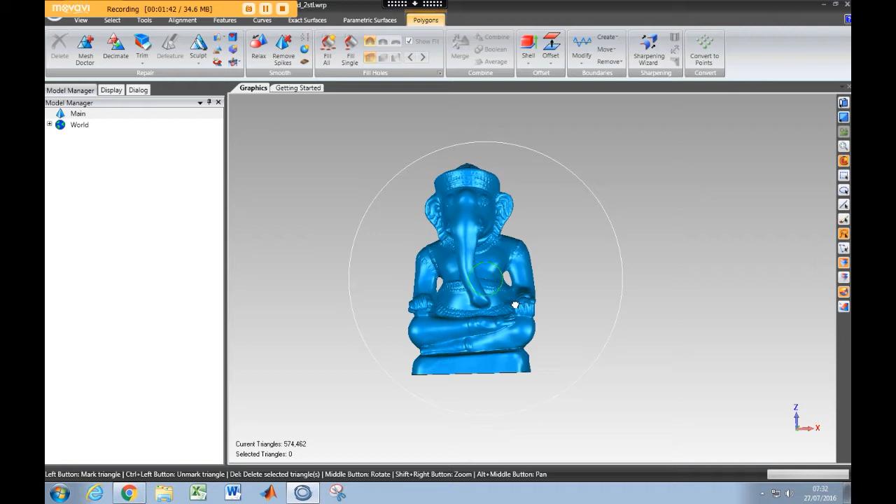Hello and welcome to this first tutorial where I teach you how to make a negative or a mold for clay casting or clay modeling using 3D printing.

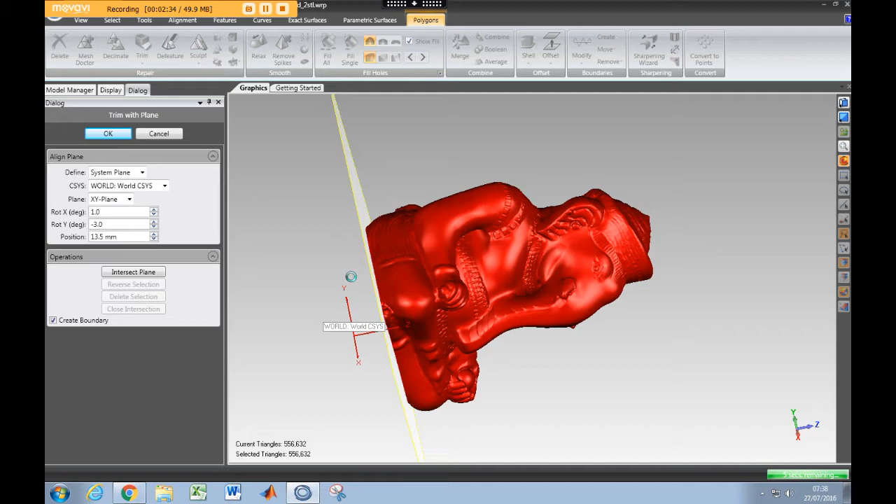I'll start by getting rid of features that I feel are not necessary. For example, the base at the bottom can be deleted, to make things more simple. I'm using the trim function with the plane option to get rid of this section. I selected the appropriate section where I feel it should be deleted, and using the intersect button I isolated that part. Then I delete it and close the intersection so that the file is watertight. So that's the result of this process.

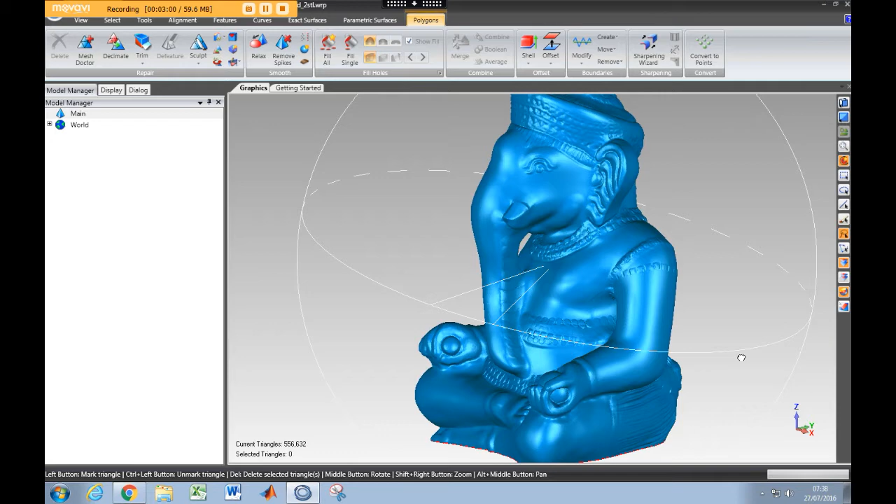This is how a normal file looks like in a software called Geomagic Studio, which is a very powerful software for STL editing and post-processing. It's also good for rectifying errors and fixing them just before printing. So I'm quite fond of this software.

I use it very often in my day-to-day life to prepare files. Just before I start making the mold, I'm going to duplicate this file, because one thing I don't like about this software is that it doesn't have an undo function. You can't use undo quite a lot, so it's very hard to recover if you're making serious changes.

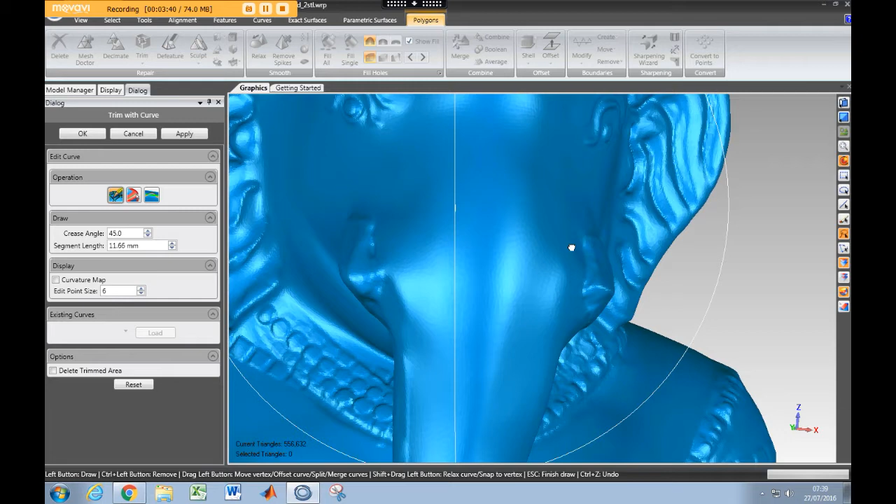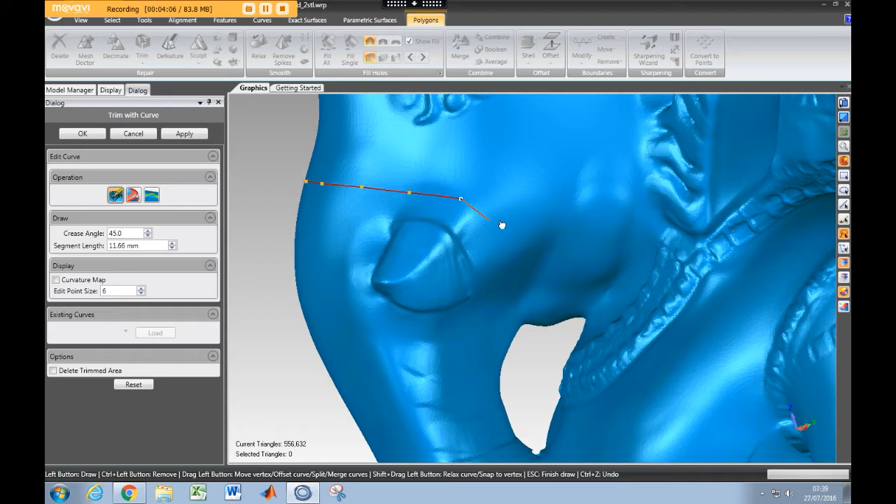Here I'm starting with a trim with curve function to isolate the trunk part of this figure. This is just to make access for the clay easy in the mold. I'll be designing a separate mold for this section, and the main mold will have a smoothed out section where the trunk is supposed to be. So I'm going to carefully isolate this using the curve option.

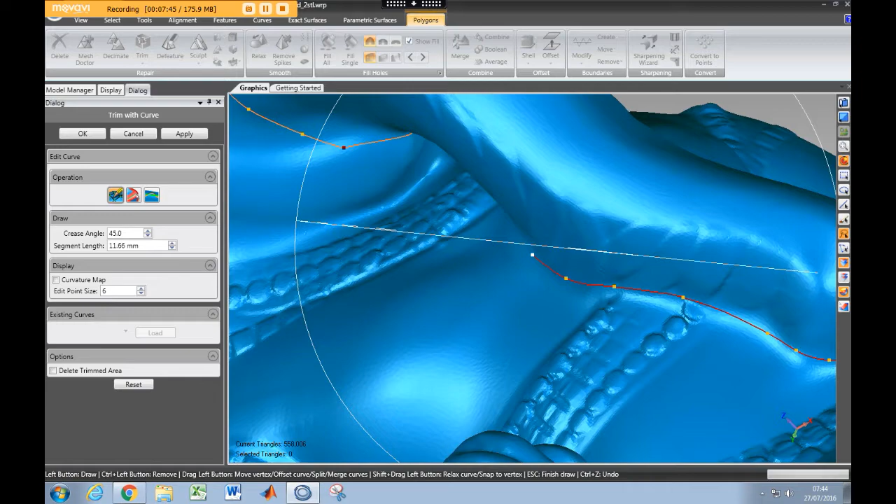I'm going to repeat the same steps for the arm and some part of the knee, just to make access very easy for the clay once the mold is printed.

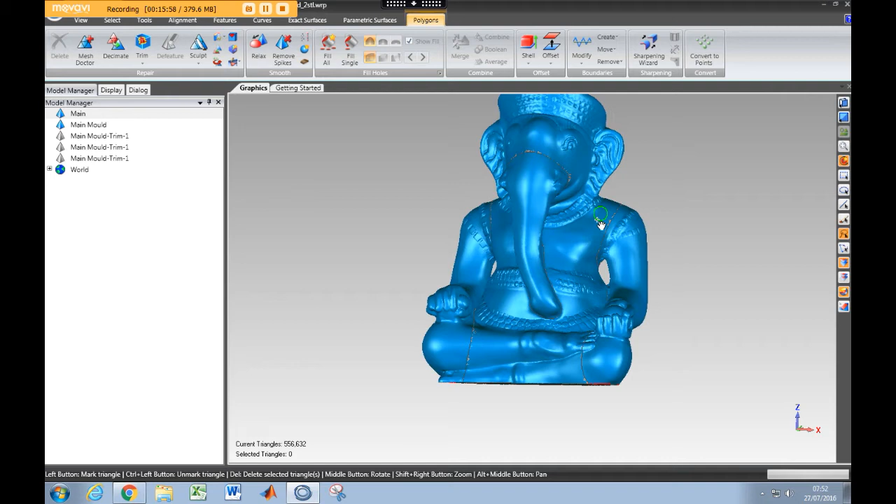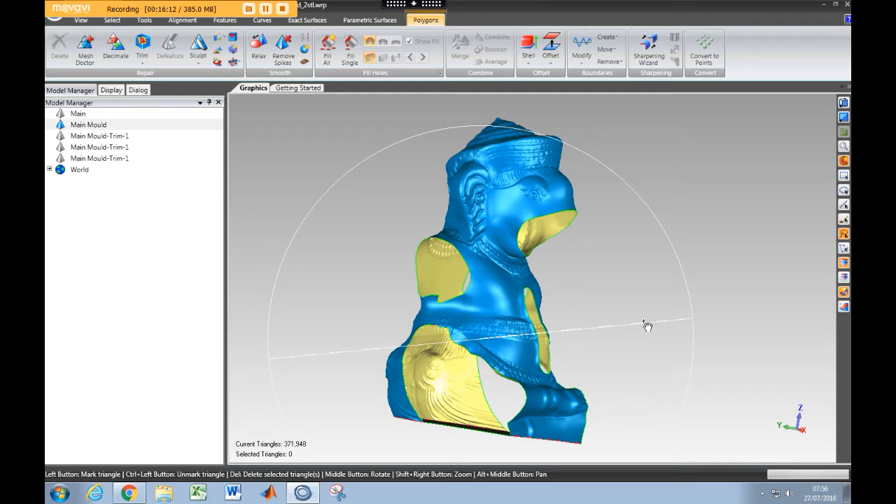This is how it will look like without the arms and the trunk portion. The next step will be to fill the holes using the fill hole option with tangent mode on. I'm going to select each hole and then fill them to see how well it's filled without any errors in the file.

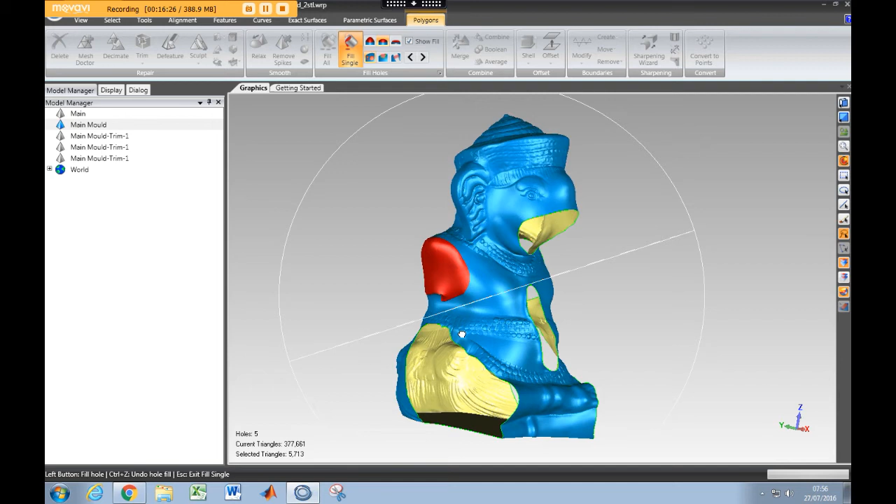Select the tangent mode, and it looks pretty well. I'm going to continue using the same option for other holes. It does look a little bit sharp on some of the edges, so I'm going to have to smooth them once I've finished with the hole filling method.

Repeating the same procedure for the trunk using tangent mode. It looks a little bit sharp here, so I'm going to try the flat option instead. This is the end result after the hole filling is finished, so I'm going to have to defeature some of these sharp edges so that the mold surface is smooth.

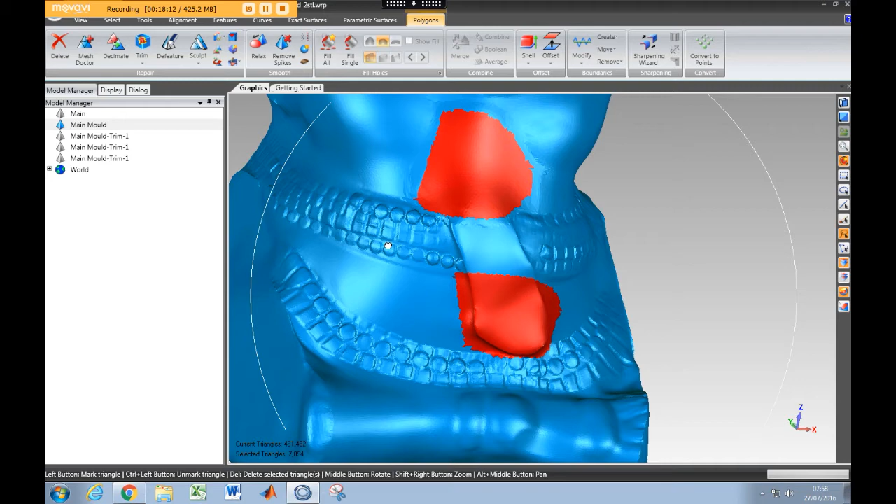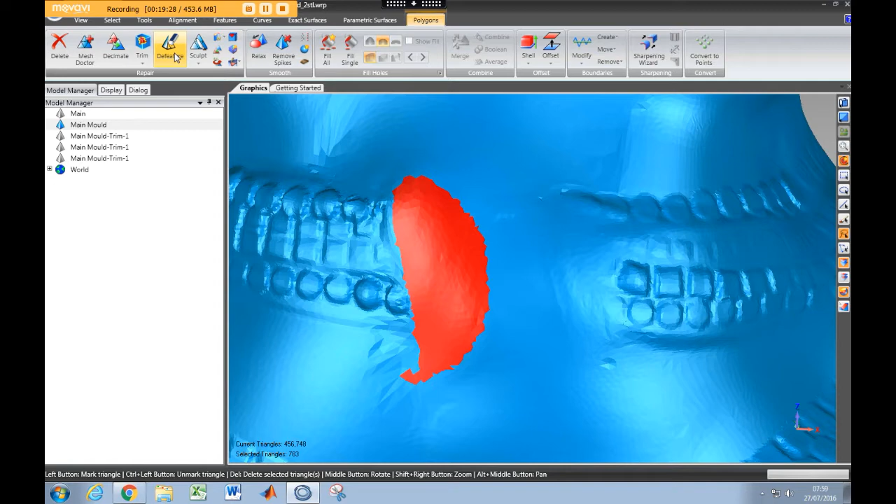I'm going to fill the rest and defeature them. I just select the area where there's overlap between the sharp and the smooth area, then select the defeature option. I'll have to repeat the same procedure for all the sections. It said it can't do it because some of the area isn't selected, so I select that area and perform the defeature operation again to see the results. Yeah, so it looks pretty good.

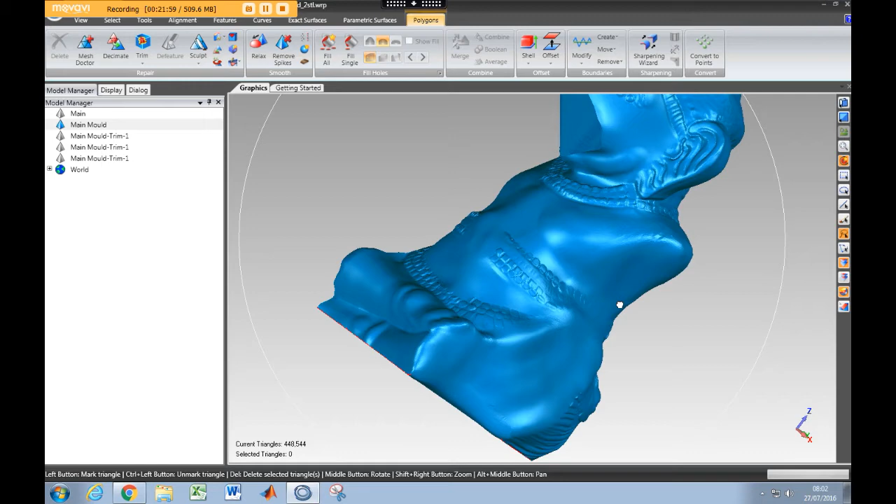I'm going to repeat the same procedure for the trunk. It forms a little bulge at the top, so I'm going to get rid of it using a smaller area. That doesn't work, so I'll defeature it, or get rid of this bulge, using the sculpt option and sculpt remove. I've increased the diameter of the tool, so you can remove the area or push it in.

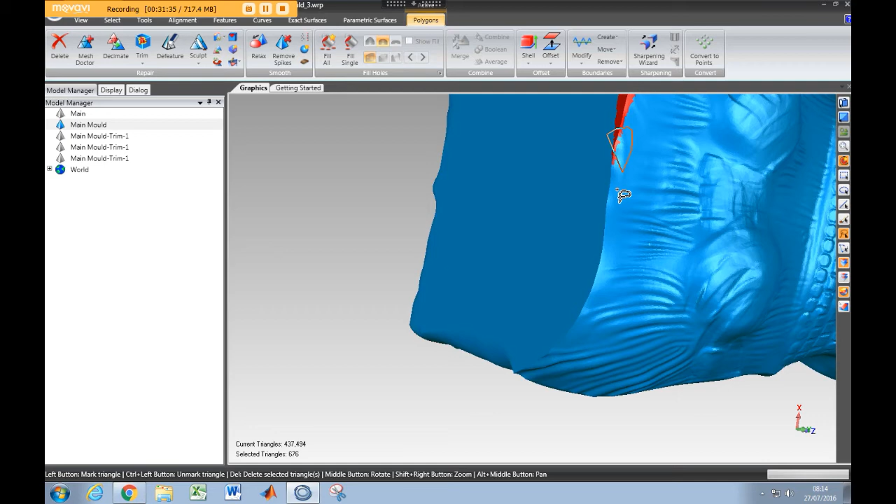So the file looks good. I'm going to use Mesh Doctor to check if there are any problems in the file. For example, there are spikes in the file, and I'm going to selectively fix these errors one by one. So the file looks ready for creating the negative.

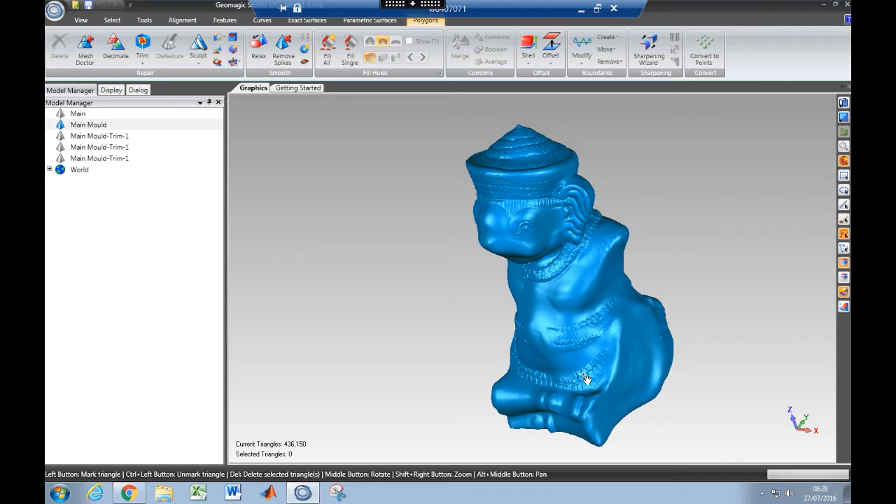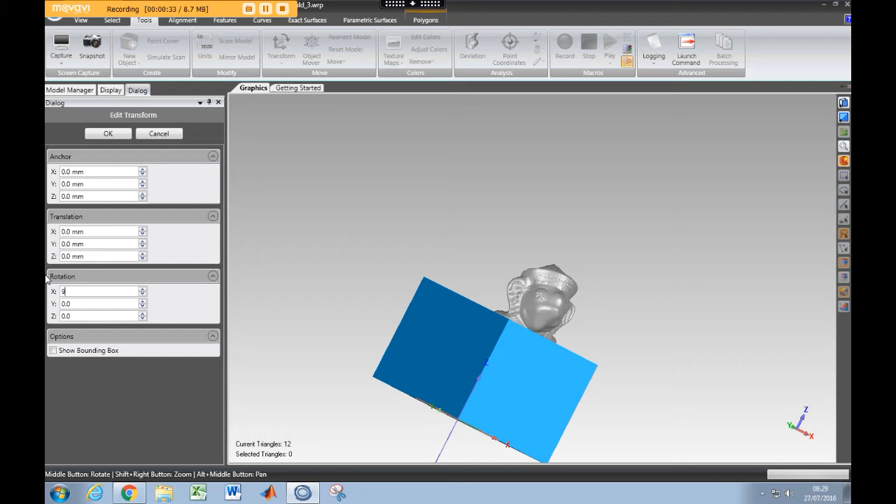I'm going to import a cube of the same size, a little bit bigger than this original STL. I'll rotate and try to fit or align the new mold square block with the existing STL file of the Ganesh.

I've made this block using the dimensions from the existing file, so it may be a little bit tight, so I'm going to increase the scale a little bit so that all the sides are covered and there's enough area. I'm going to turn the transparency on just to see how it fits within this given volume.

It looks pretty good, so I'm going to reduce the areas on the top just to make this model a little bit smaller and increase the area on the sides so that there is significant thickness to the file when I'm printing it.

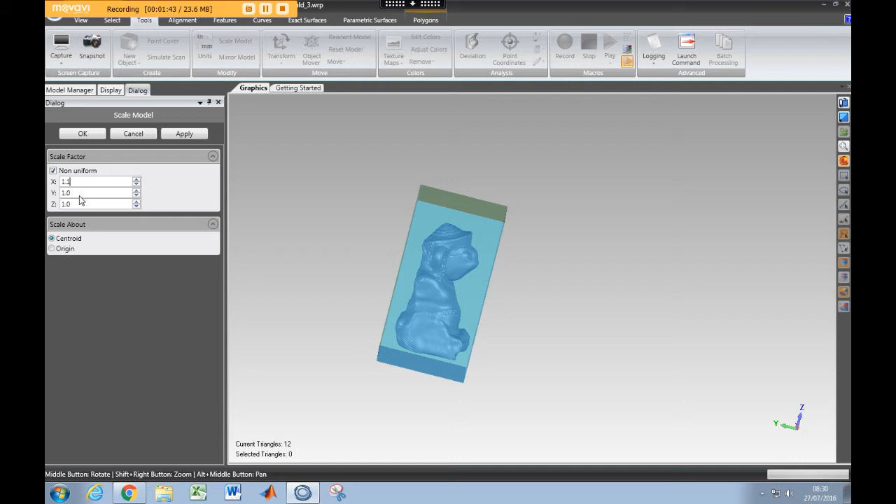Going to reduce the area on the top, so I'm not wasting my material when I'm 3D printing this thing. I'm going to change the scale on the Z-axis so it's a little bit shorter, and then it fits well.

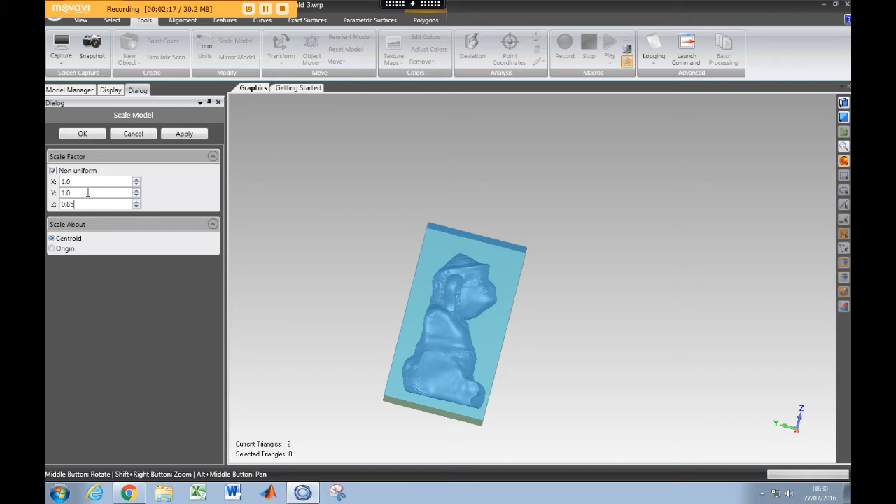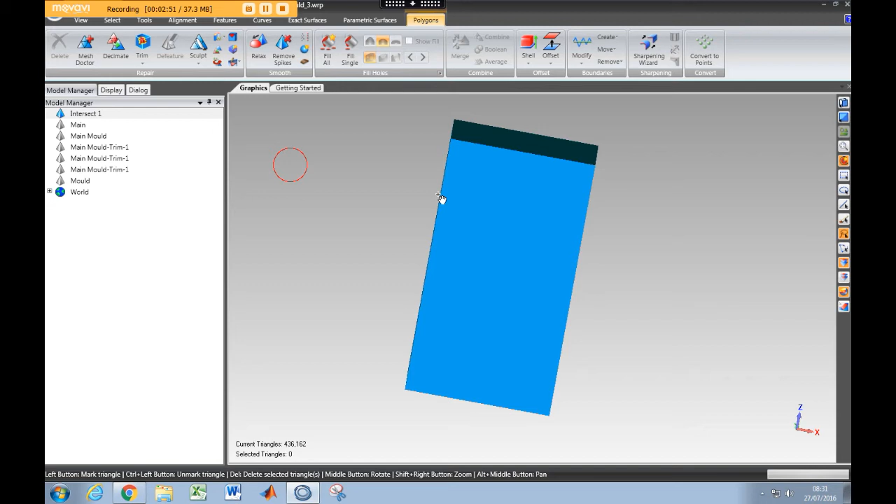So it looks quite enclosed from outside. The next step will be to make a boolean of these files, so I have a tight surface. It will be one STL file, and then the STL of Ganesha, or the section of Ganesha, will be looking inside, and this will be looking outside.

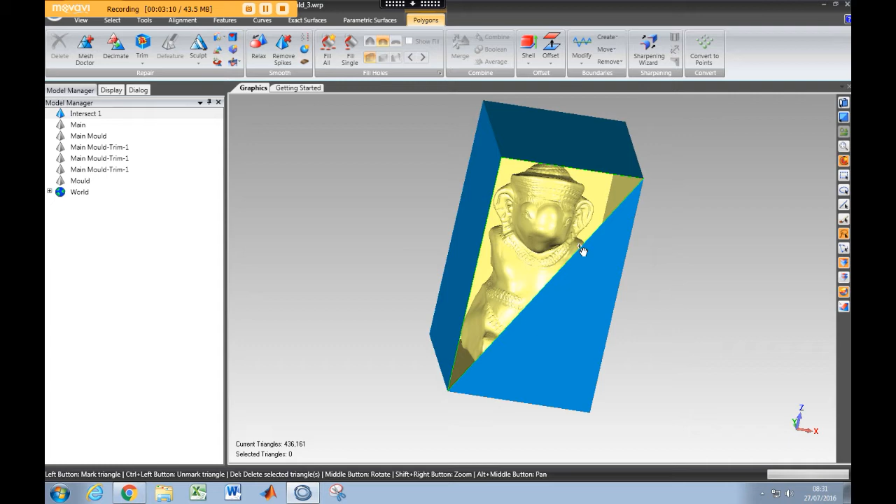But as you see, both the files are looking in the same direction. So I'm going to use an option called flip normals to change the direction, or the vector direction, of the Ganesha file that's inside. Just by clicking flip normals and apply and clicking on the file, I can change the direction. So now it looks like a shell with the faces in the right directions.

I'm going to name this as mold, and there will be a few duplications of it, because a mold is not just one part unless it's casting. This is a clay model, so it will be separate into a few parts, for example 3 or 4 parts, and then they'll be combined together and pressed together, and the clay will be formed.

So I'm going to turn the transparency on again to see where I should make the cuts. I believe that it's quite symmetrical, so I'm going to cut it in the center, but just change the angles a little bit, because I feel that the ears are not aligned and they're not symmetrical.

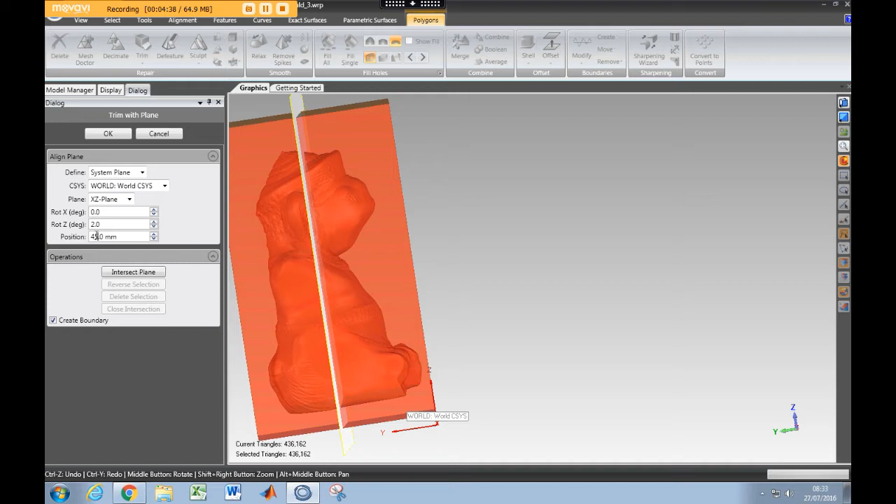So this will form our first cut. I think this is a sufficient angle, and I'm going to just check from the top view that it matches my assumption.

I'm going to split the ears in half, so that one part is in the first mold and this other part is in the second mold, so that the clay can penetrate that small section. There's no convex area inside.

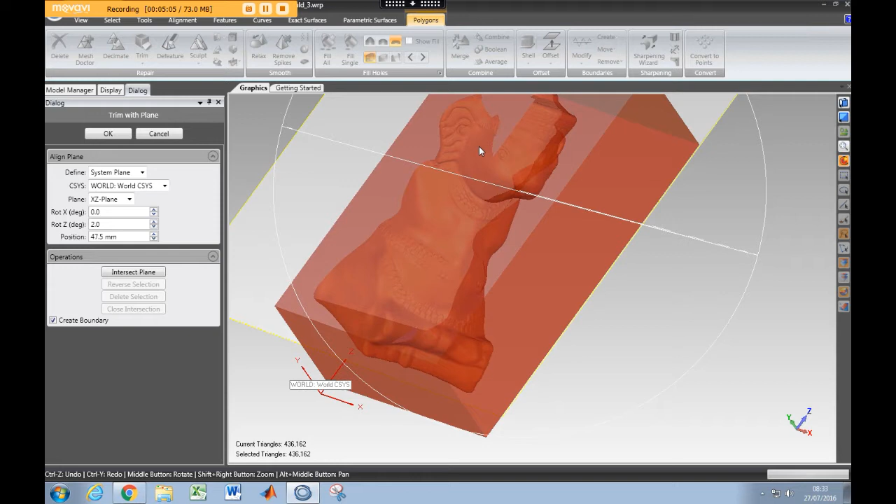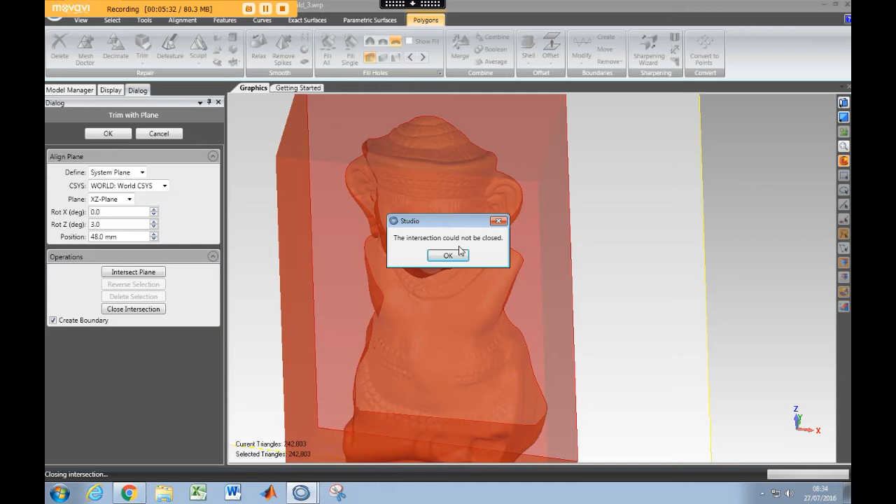I'm going to remember these values so that I repeat the same procedure for the other half. The fill option is not working, so I'm going to fill it later. I'll repeat the same procedure for the other half of the mold, selecting the same values so that they match and form a parting line in the center.

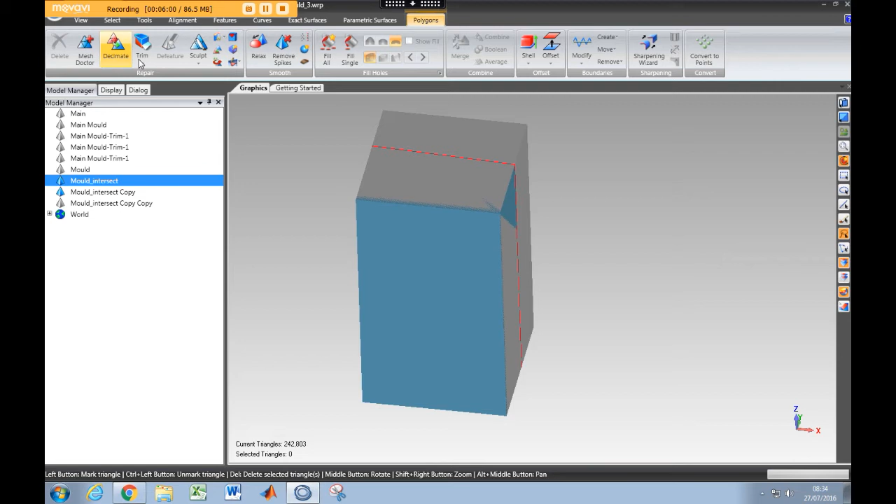It worked for this section but didn't work for the other one, so for the other one I'm going to have to fill it manually. It does show some problems on the top, so that's why I've kept this extra bit on the top and the sides so that I can delete it and get rid of the problems.

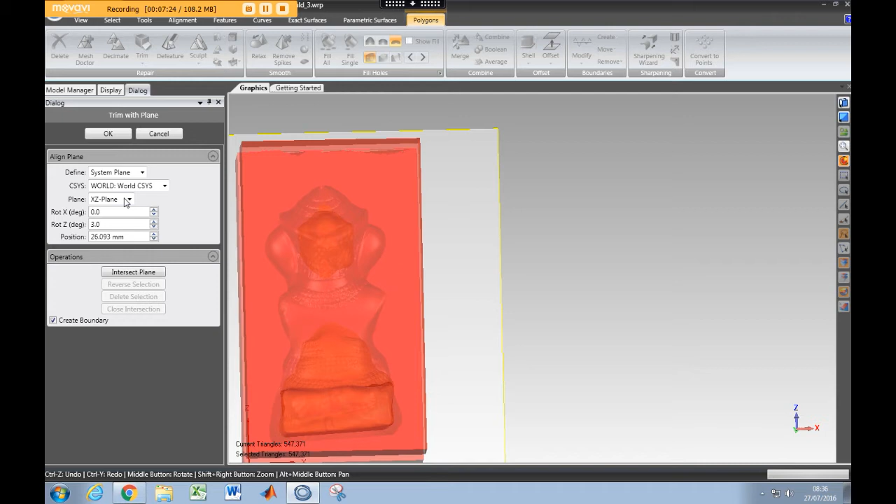So this is both files together, and I'm going to have to delete some of the sections on the top and on the sides so that there are no problems with the triangles in the STL file. I'm just going to select 5 millimeters on each side to get rid of. It should give me sufficient wall thickness for 3D printing.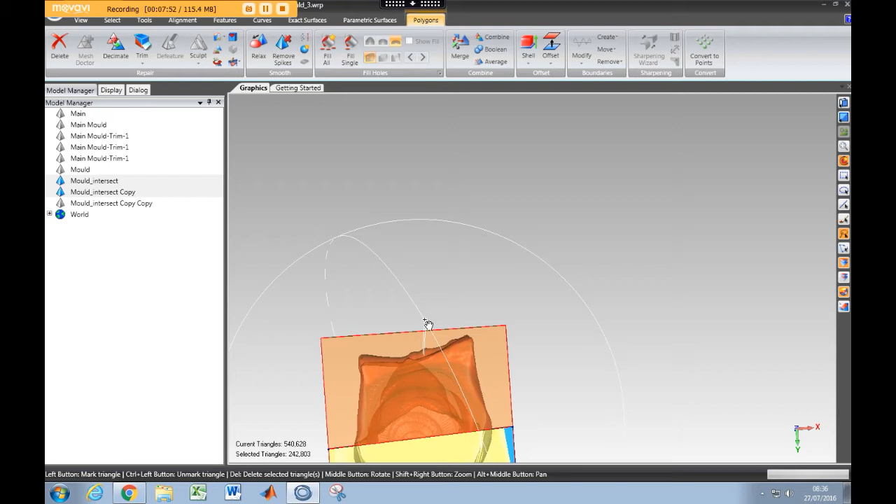So I'm going to fill these holes manually. I didn't select the automatic close intersection option because I knew there would be some problems. I'm going to use the flat option again to see if it works. It doesn't work because the other side of the mold is also open.

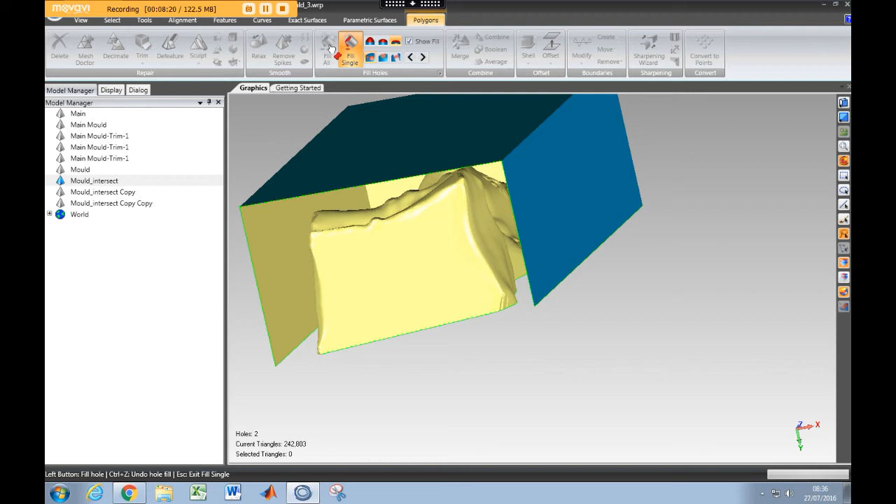As you can see, it's open, so I'm going to have to create a bridge to separate these two holes. I'm going to select the bridge option. It doesn't seem to be working on this side of the mold, so I'm just trying once more.

No, it doesn't work, so I'm going to undo and go on the other side of the mold to see if it works here.

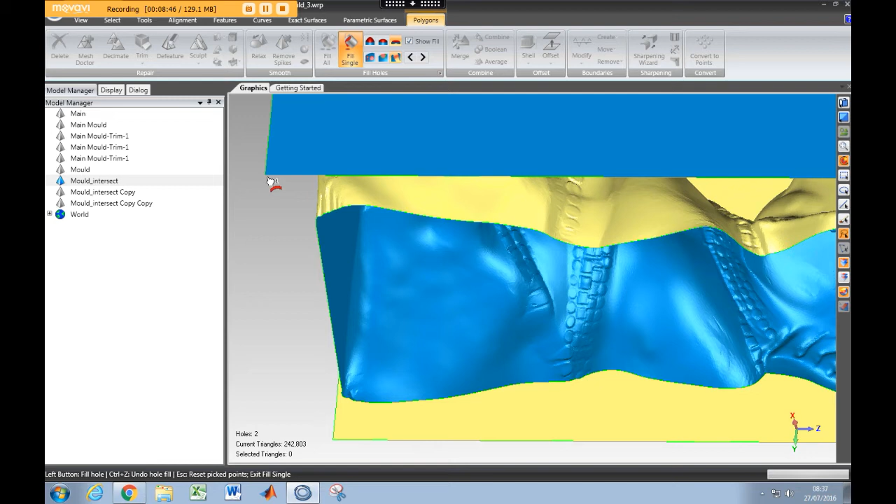Because this mold was created from SolidWorks, it creates a minimal number of triangles—the minimum required to define a cube is about 12, so it's quite large triangles. I'm stuck with options to fill the holes, so I'm going to delete this again because it's overlapping the existing negative of the STL file.

Now this section is critical because I don't want to create a lot of problems in the file. I'll come back to this later and fill the rest of the holes.

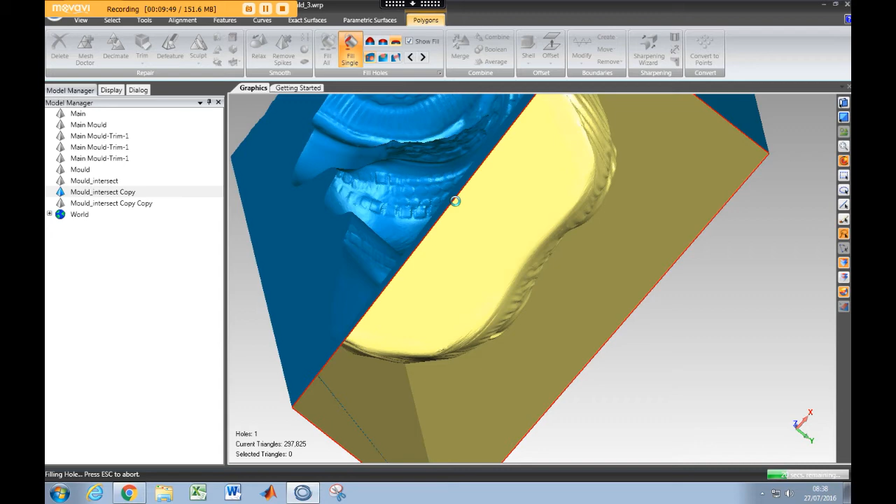You can see from here that there are some problems with the file—for example, some intersecting, overlapping triangles. So I'm going to create the bridges again and fill the sections with the fill hole mode, which gets rid of the overlapping triangles.

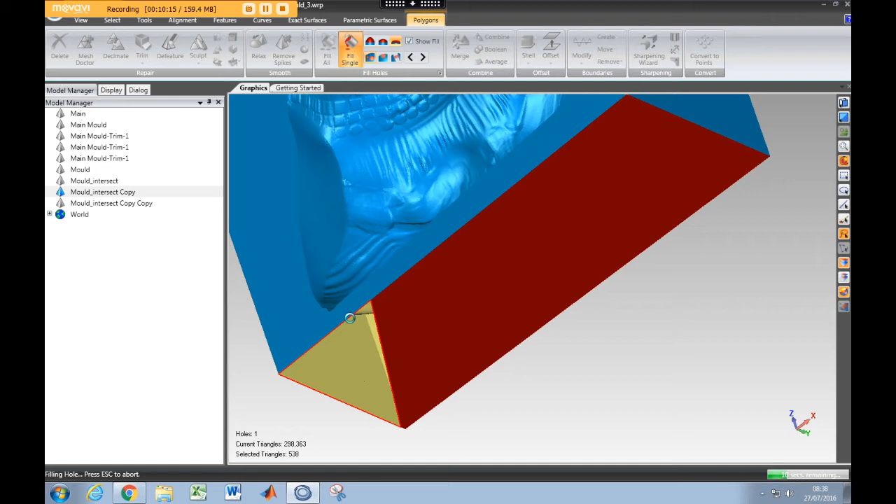I'm now going to fill this section which the software wasn't able to fill automatically. I'll select the flat option with the bridge option, dividing this hole into several smaller holes so the automatic hole filling can take care of the rest. I don't need to repeat it.

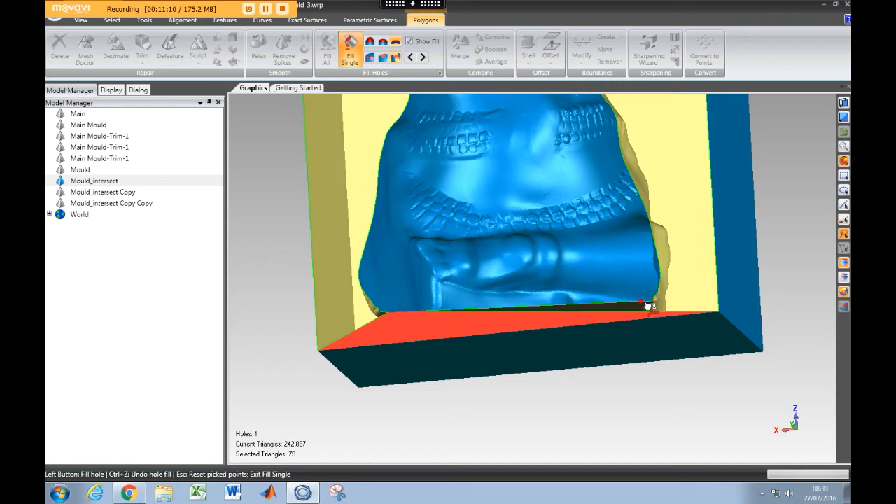The bridge option also helps define sharp contours on the edges of the holes, so that during automatic hole filling it ignores those areas. This helps avoid overlapping triangles and lets you fill all the gaps without problems.

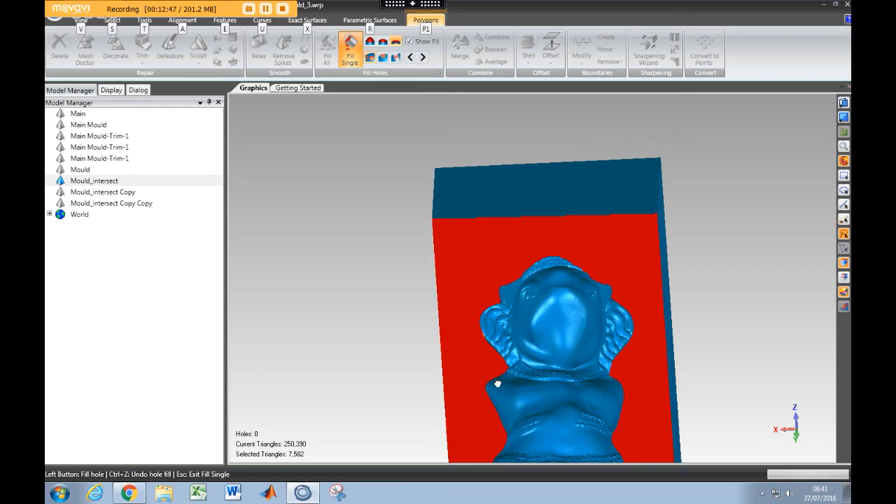So this side looks completely filled without any significant problems. There are some small issues, so I'll selectively get rid of them—sharp contours are very difficult to fill using the automatic fill option.

So I'm going to manually delete all these problem triangles, and then fill the holes or cavities again using the flat option.

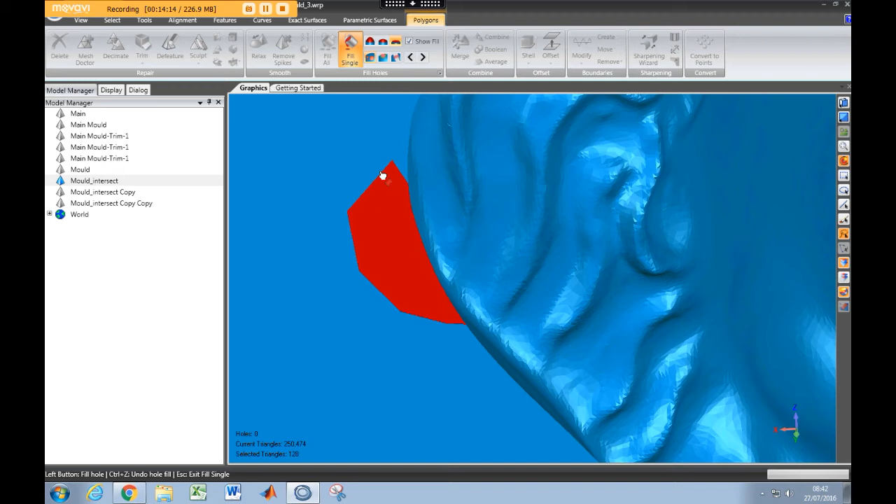I'm quite happy with the results, so I'm going to resume cutting off the tops and sides to get rid of the overlapping triangles problem. I'll trim with a plane again on the top, just by 5 millimeters.

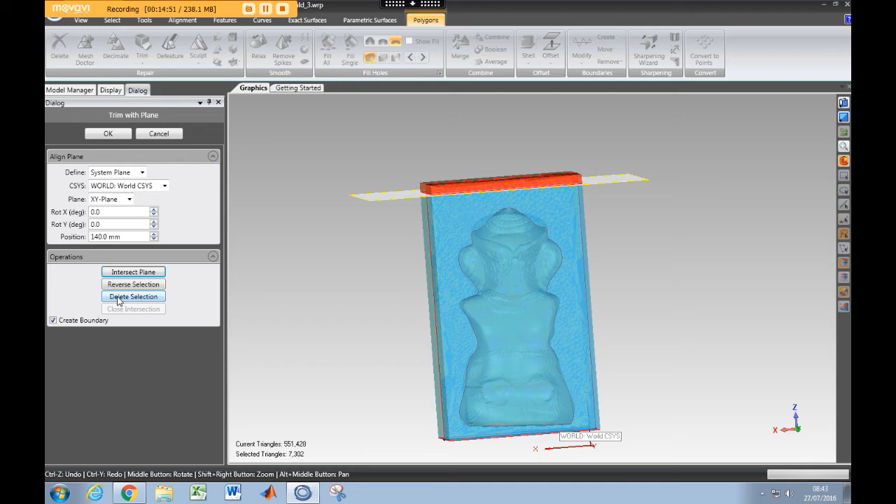And then manually fill the holes. I'm going to turn the transparency off just for a second to see the hole filling. The flat option should work since there aren't many problems on the top—I'll have to disable the fill hole and select again.

So it worked fine this time. I'm going to cut the sides now.

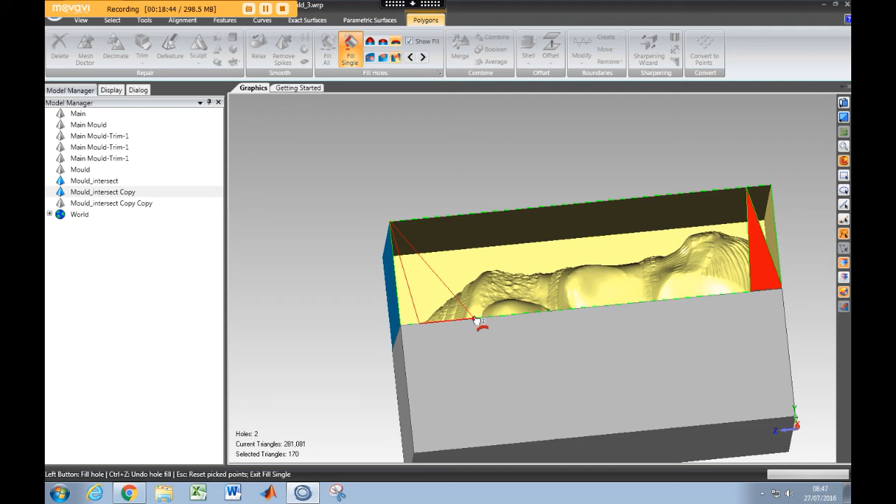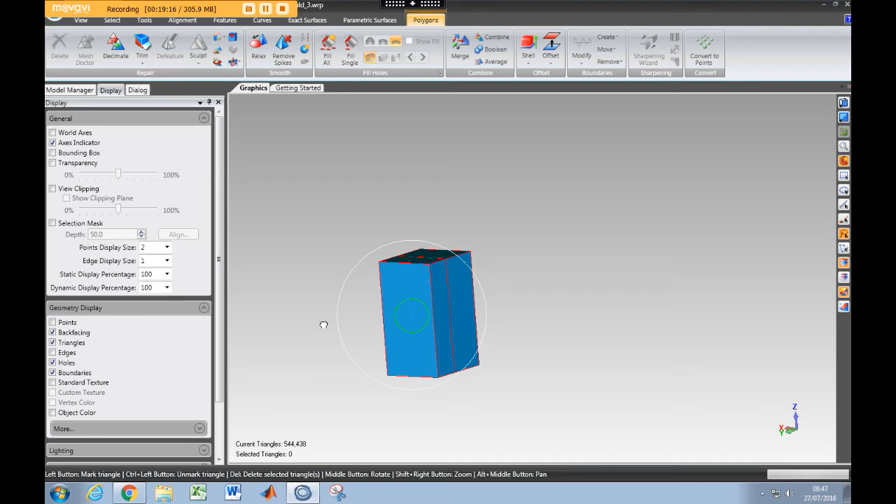Once these steps are done, I'll check if there's enough wall thickness on the sides and top so it can be 3D printed. I'm going to get rid of the boundaries—no specific reason, but just to make sure that when filling holes it doesn't automatically select the boundaries. It looks pretty good, but there are still some very difficult to access areas I'm looking for.

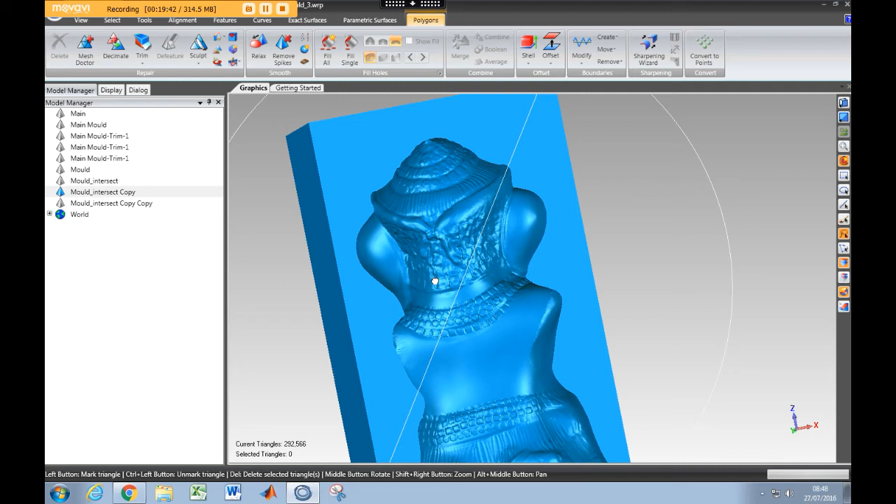So this side, the back side, looks okay. I'm just curious about any difficult to reach areas for the clay.

I'm going to smooth these molds once they're printed, but I still need to take care of the convex areas in the modeling process so I have less work to do on the prints.

This looks pretty complex, and especially the legs seem a little difficult for the clay to access—once it's in there, it will be difficult to remove.

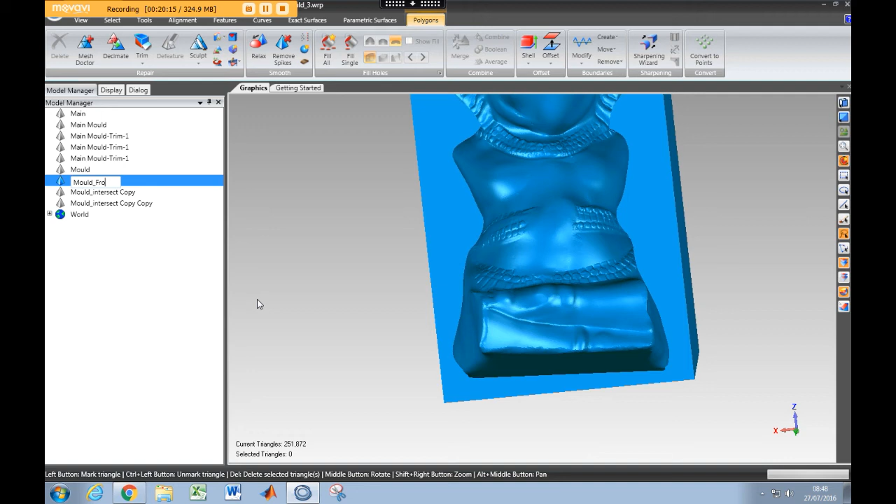So I'm going to cut this particular section into two again, so it will be 3 molds instead of just 2.

I'm going to rename these just to avoid confusion—I'll rename them front and back.

So this looks pretty accessible, only the front one is the problem, so I'm going to cut it into two.

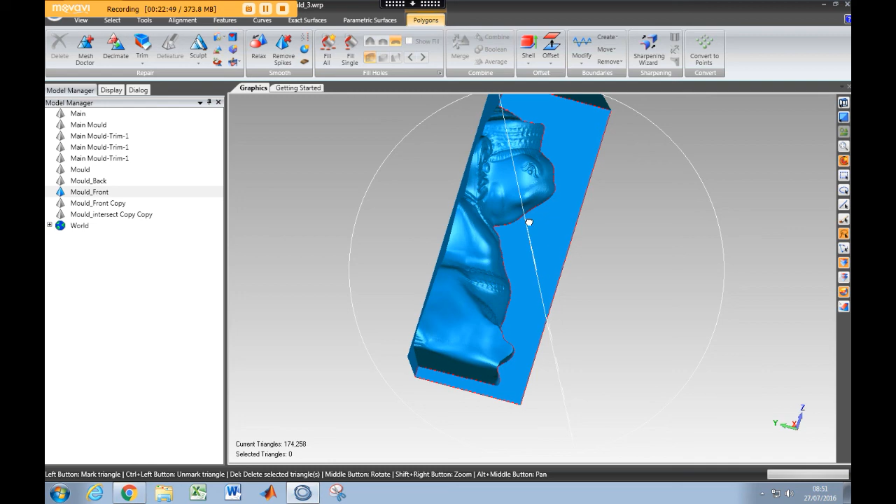That's the second part of the front mold. I'm going to rename these as front 1, front 2 to avoid confusion.

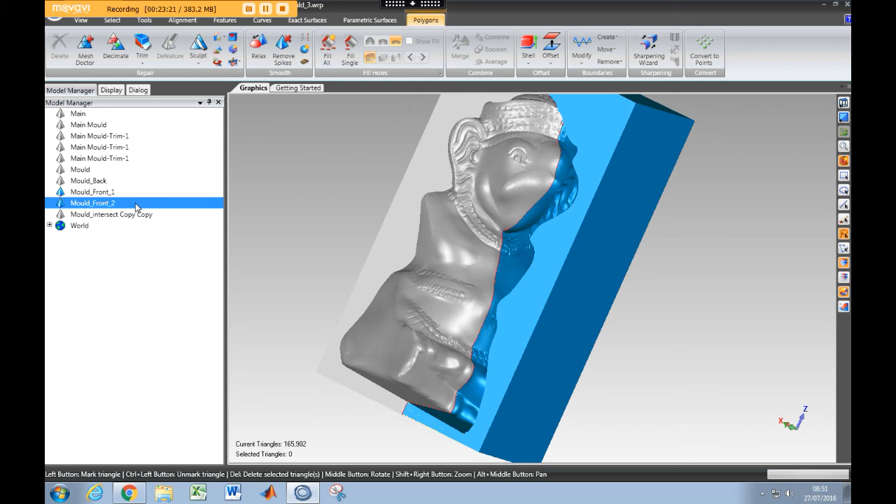So there you go, the molds are ready for printing. In the next video I'm going to show you how they look after printing, and then I'll be making the actual clay model from these molds. Thanks for watching.